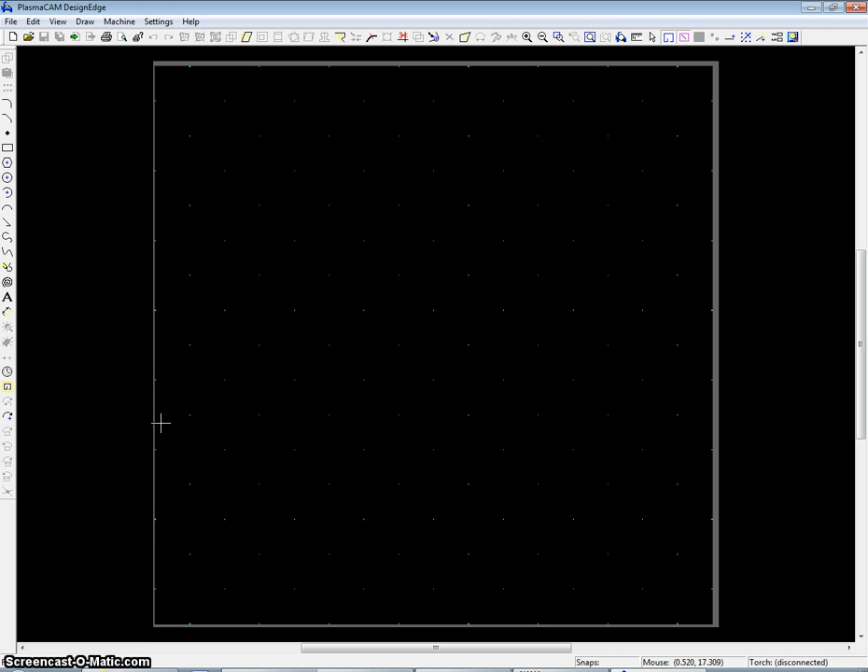It is possible to draw with this program, with some of these tools here, but it's really hard to dimension and to do complex shapes. Real quick, just do a rectangle. Where do you want to start? I'll start at 0, 0, enter. Where do you want to go to? I'll go to 20, 25. So it's basically that kind of thing where you're having to type in coordinates. And most people would find it easier to use a program like AutoCAD or SolidWorks or something else where you can quickly design and dimension parts.

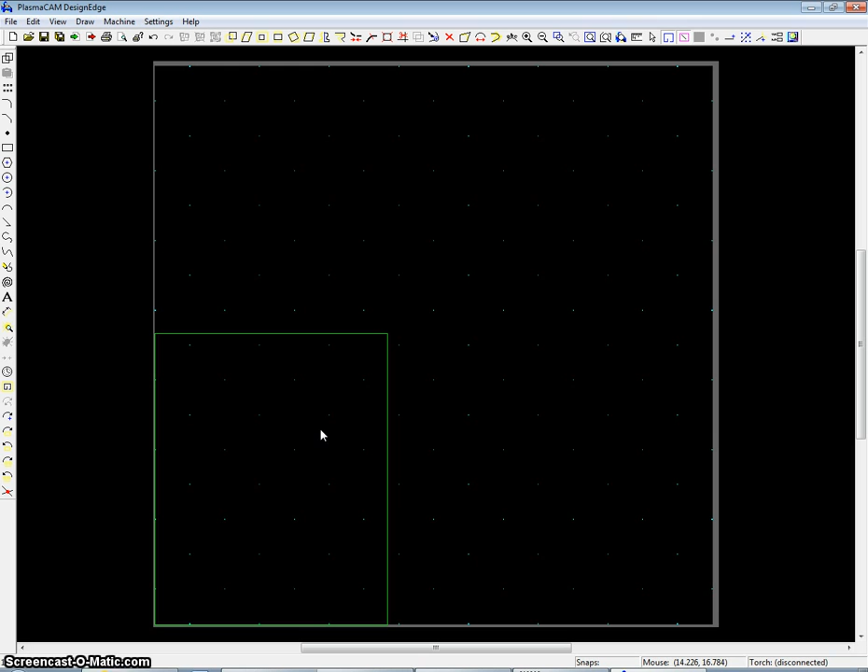From a CAD program like the two I just mentioned, what you want to do is save as a DXF file. DXF would be the best format to bring in. So that's what I'm going to do right now. I'm going to go File, Import, and I'm going to bring in a DXF file that I already have here. And it comes right in, and this has already been dimensioned and it's ready to go.

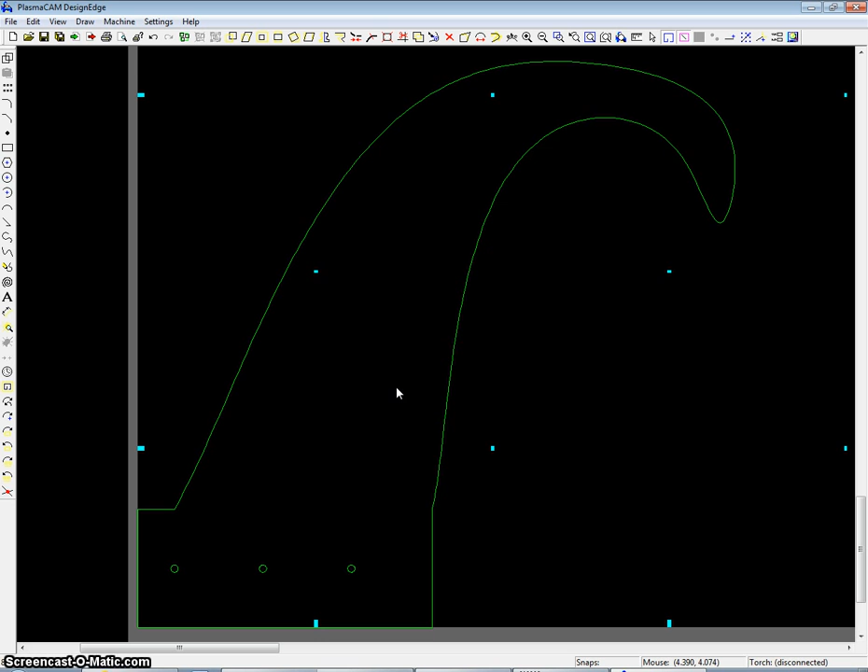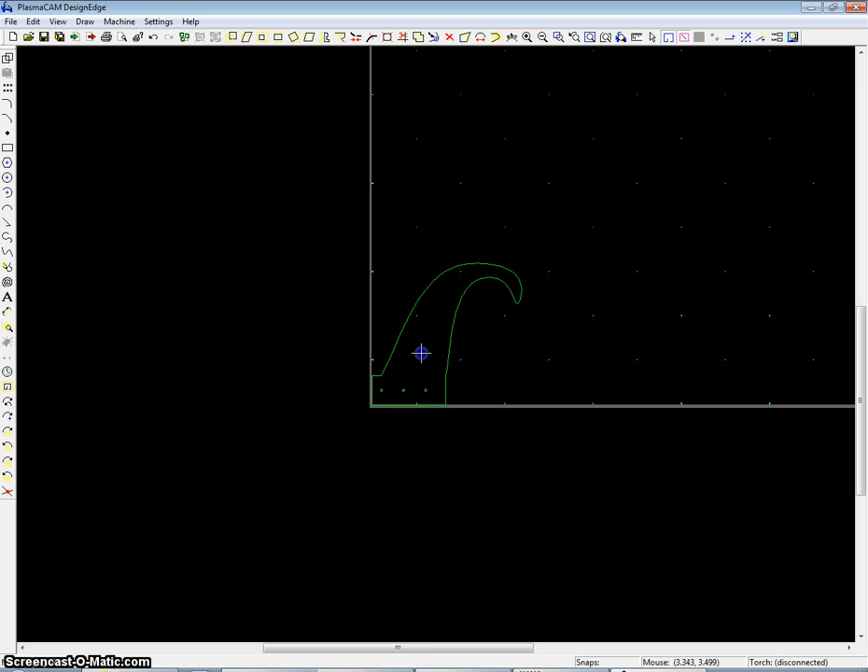A couple quick things right off the bat. The F2 key on the keyboard zooms you out, and the F1 key zooms you in. If you hold down your mouse button, you can highlight things. If I press the M button on the keyboard, then it says move from point, so I'll left click and I can move it. You can also do things like scale. You can copy and paste. You can make duplicates. So that's kind of how that works.

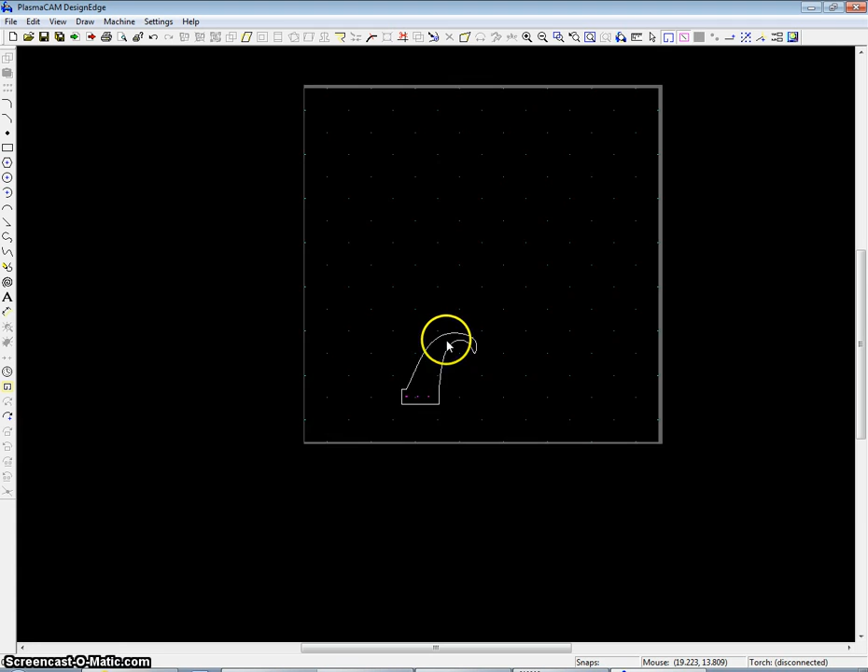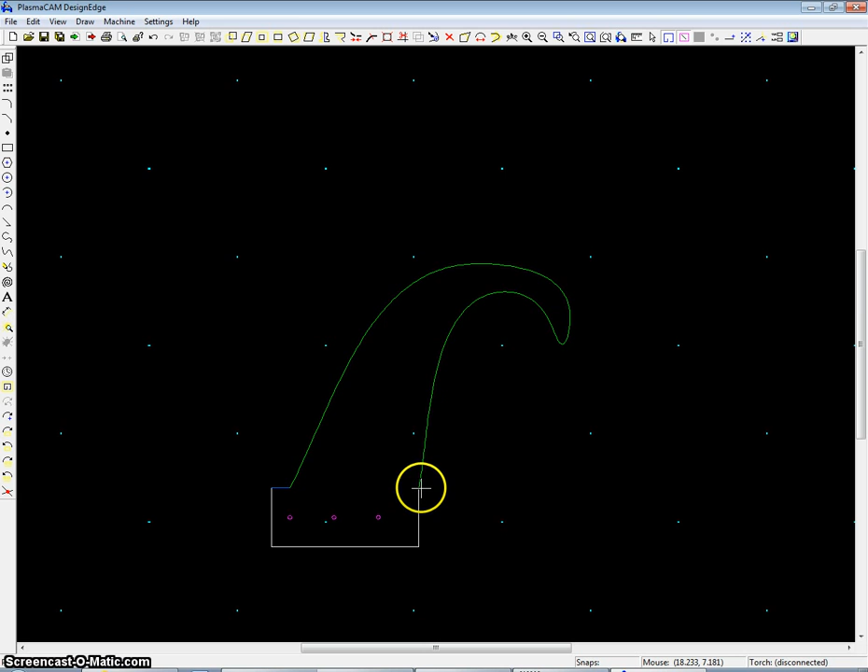So now what we have to do is make a cut path. A cut path is telling the machine where you want it to come in and fire off the torch. Do you want it to cut around the inside of the line or the outside of the line? We'll have it do these holes as well. If I go to the machine menu and I hit convert to cut path, then if I click on the outside of this white line, the machine would cut that line. If I click again, it would cut that line. And if I click on the inside of the circle, it would cut the inside of it. And so basically I made a cut path.

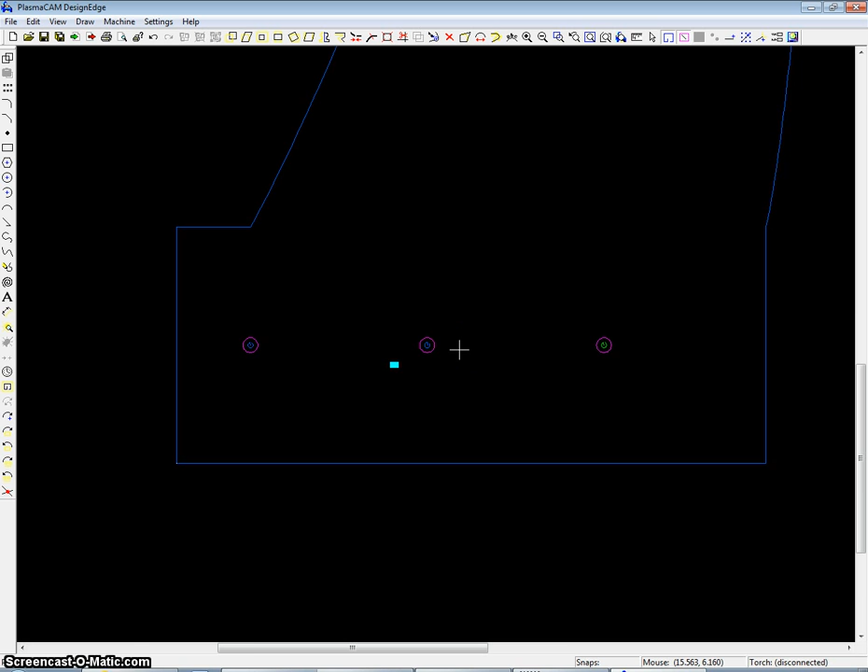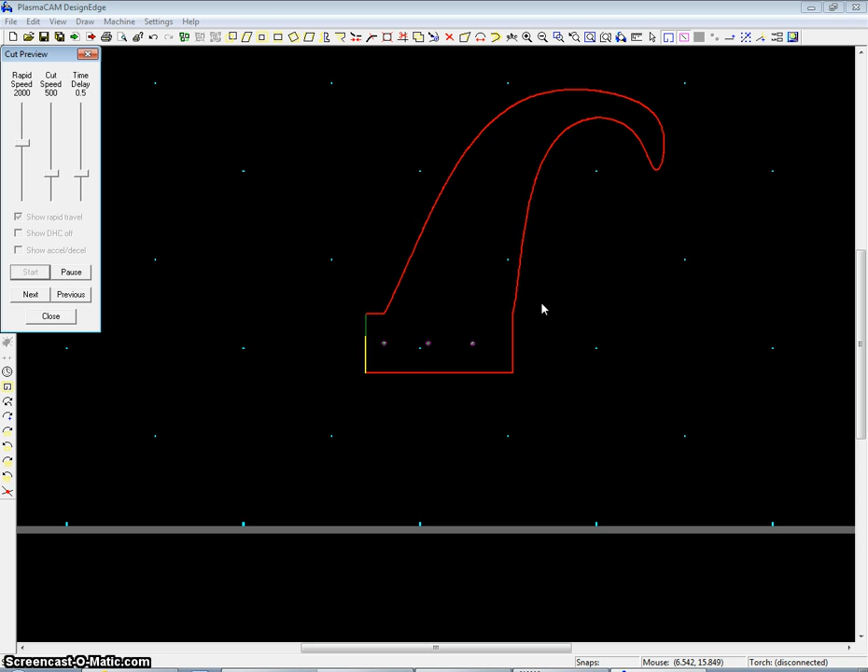But it's not really ideal right now, because, I'll hit escape, by the way, to stop that command. If I highlight this and go to cut preview and hit start, the machine's going to do this in like 5 separate cuts. So it's not ideal, and I wanted to make sure that you knew that the better way to do this perimeter would be to link this together.

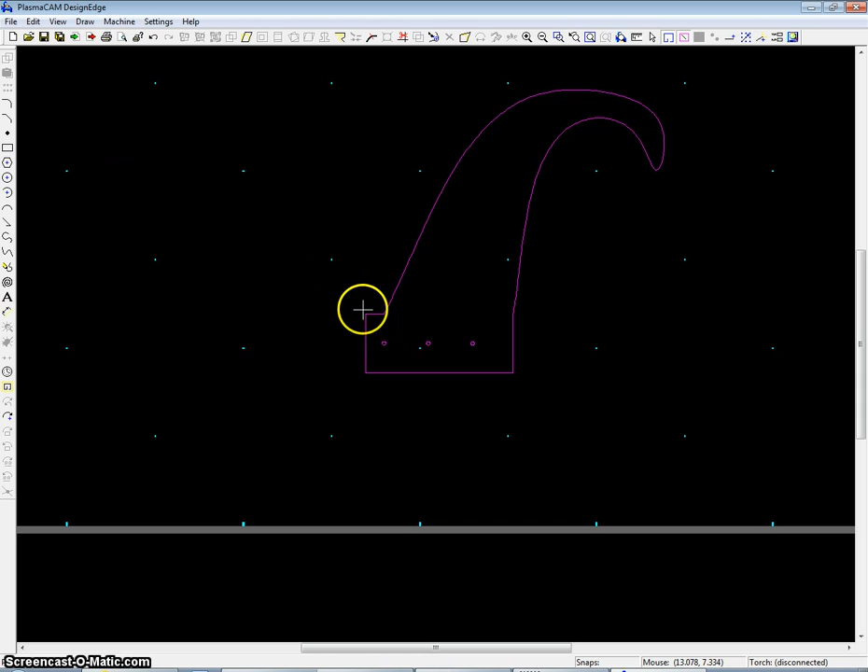So if I hold down the control key and click all this right here, I've highlighted all these lines. I can go to the edit menu and hit link. So now this perimeter is all just one thing. So it's better now for cutting. It's going to cut it all in one fell swoop. So if I go to convert to cut path, I click on this. It says, do you want to convert the holes to the inside path? Yeah, I'm done. And you can also see right here, this is showing the machine's going to fire off here. It's going to come in, go down the line to the right, and end up right there.

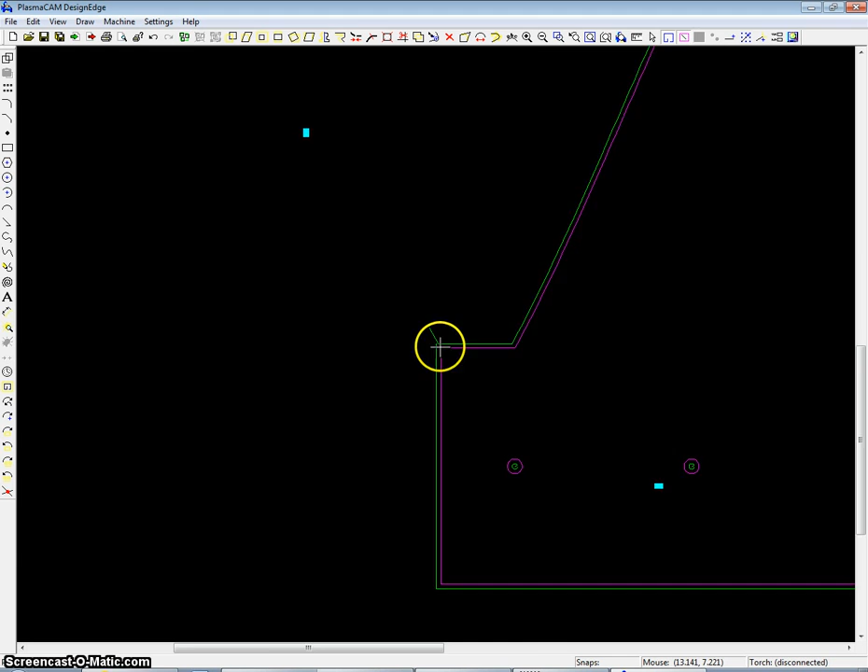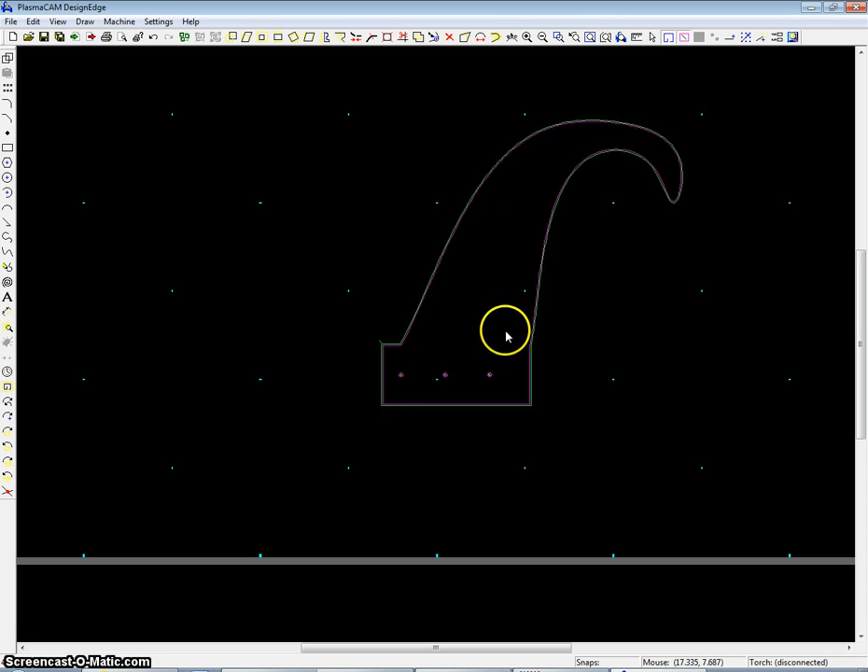All right, so now if I go to cut preview, hit start, it's doing the holes first, and then it's doing the perimeter. And that's actually what you want. Let's say it did the perimeter first, then the holes. That'd be bad, because it would cut out the perimeter, and then this piece might fall out or get tilted on the grid. When it goes through the holes, it's going to error out because the piece is not level.

So what I generally always do is I like to pick the order. If you go to Machine, Reorder Paths, Pick Order, then I can say I want to do this hole first, this hole second, this hole third, and that perimeter last. I'll hit Escape, then highlight this, cut preview, start, 1, 2, 3. It's going around. Perfect. So that's a big part right there, getting the cut path to work.

Next thing we have to do is we have to get the machine ready. So it's important to turn on the plasma cutter. And with the plasma cutter, there is a compressed air ball valve. You want to put the ball valve on first, and then you want to put the plasma cutter on second. And if all goes well, you should have a green light here. If you have an amber light here, it means you probably didn't have the compressed air on first.

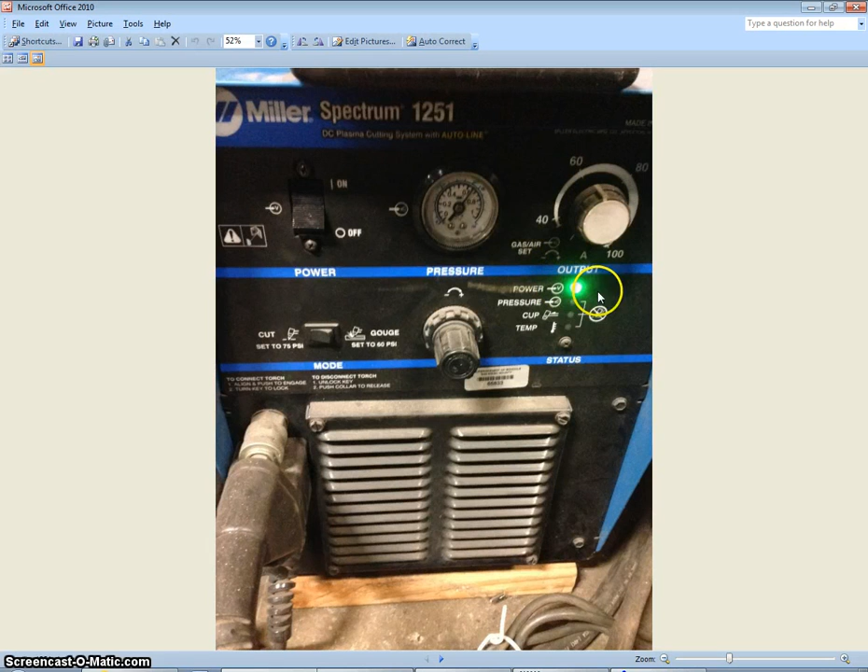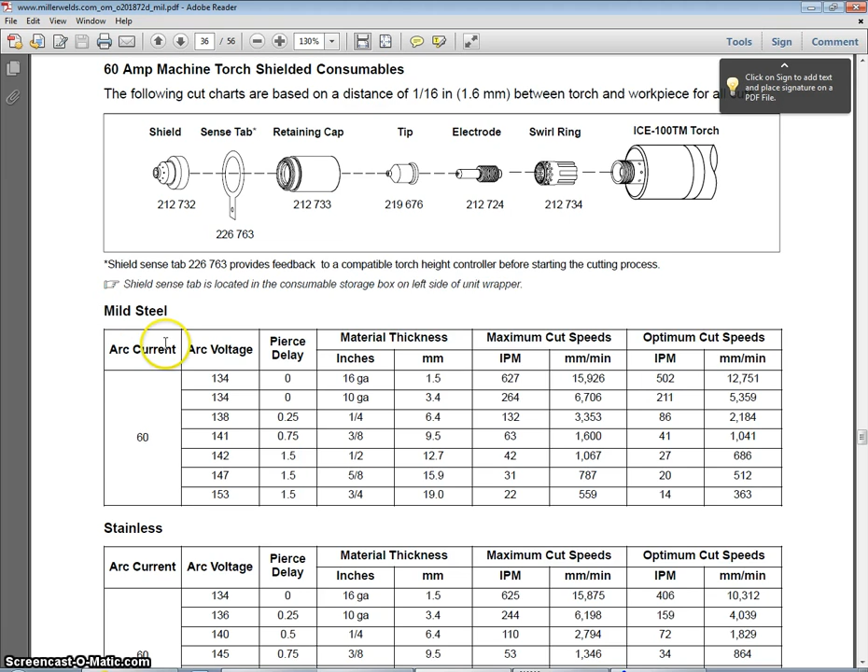So the other thing is there should be a yellow notebook right on top of the computer there, and on page 36, it's important to understand this. We have 60 amp cutting tips. So in other words, this tip and this electrode are kind of married together at 60 amps to cut. And then right here it says mild steel, stainless, and aluminum. So this is going to tell us how fast the machine is going to cut.

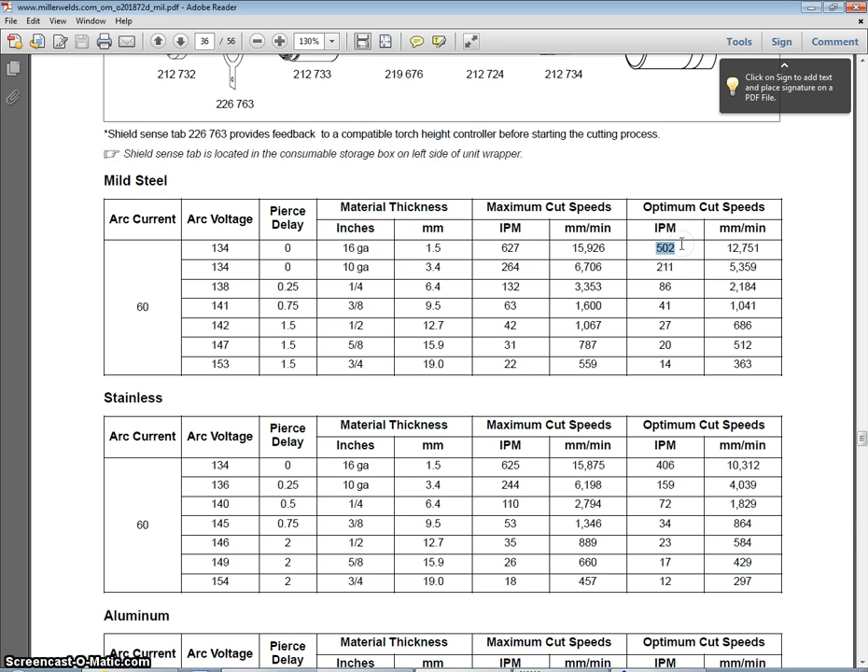And let's say, for example, if we're doing mild steel, 16 gauge material thickness, what I would look at is the optimum cutting speed. And IPM stands for inches per minute. And so 502 is the magic number. If you were cutting 3/8 steel, then I would cut it at 41 inches per minute. If you're cutting, say, 12 gauge or 14 gauge, just do some math to get the average between these numbers and figure it out. But right now, 502. I want to memorize that number.

In PlasmaCAM, where do you put that number 502? What you have to do is go to Settings, and then where it says Machine Control, you've got to get this right. This is crucial. So 502 is how fast that machine is going to move.

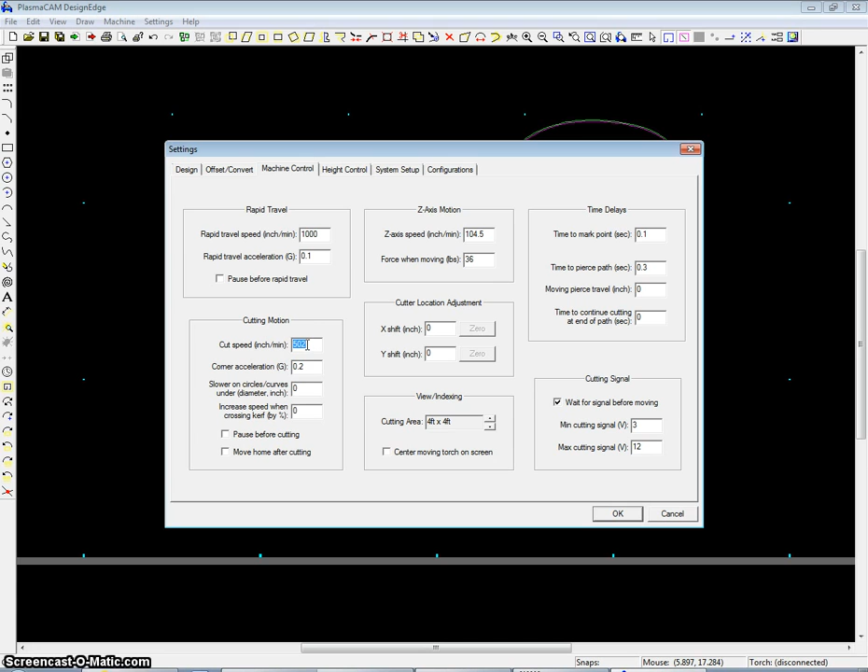Other than that, for this video, the height control can do some advanced things, but for right now, I'm going to not have this stuff checked off, which basically means I'm going to set the torch to be about a 1/16 to an 1/8 of an inch above the metal. And we'll cover more of this later on. So make sure you get the inches per minute right.

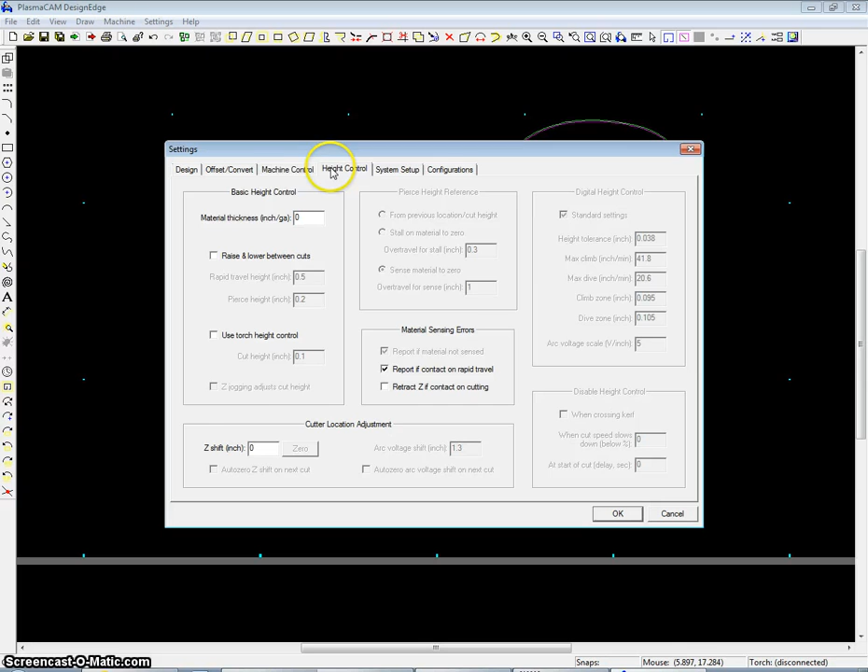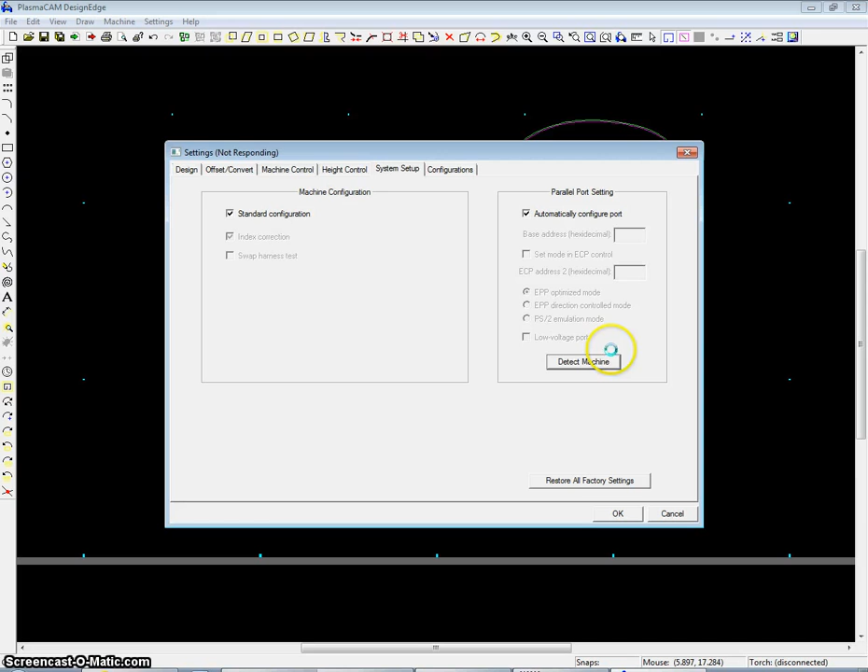Also, over here on System Setup, every time you have the machine on, you have to hit Detect Machine. It takes a few seconds. And then it should say Detect Machine Successful. Okay. Looks like it's not going to work right now. Something's going a little wrong, but it'll say Detect Machine Successfully.

And then after that, what you want to do is go down to Machine and then Initialize. And the machine will move around for a few seconds and home itself on the X, Y, and Z axis. And so once that's done, you're talking to the machine, and when you hit Cut, not Cut Preview, but Cut, it's basically going to send this to the machine and it's going to cut.

And what I recommend doing always is this button right here that says On Off. I recommend having it be off, meaning no green light here, and just do a simulate, often called a dry run. Just look at the machine, make sure it's cutting no more than an 1/8 inch off the metal and your piece of metal is not moving. If it is, it needs to be clamped down, and do one dry run, maybe even two. Make sure it's good. Then you want to click this on-off button. You have a green light.

You want to make sure everyone around you within 15 feet has glasses on. Sparks are probably going to fly. You want to have the fans on, the garage door open, wear maybe number 5 red goggles if you're going to be watching the arc. Don't watch it with a bare eye. And at that point, you have to go back to the machine and go cut again, and then it'll cut for real.

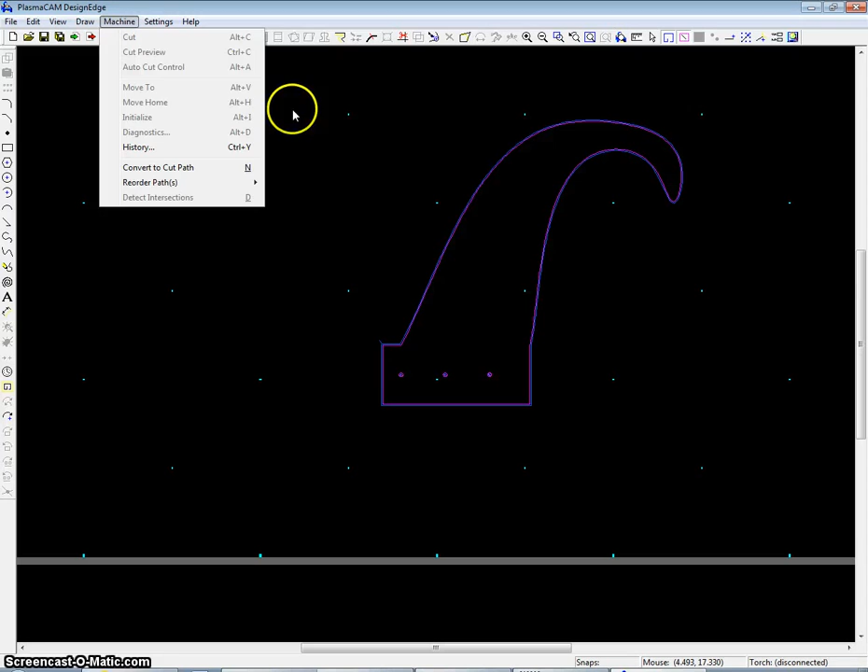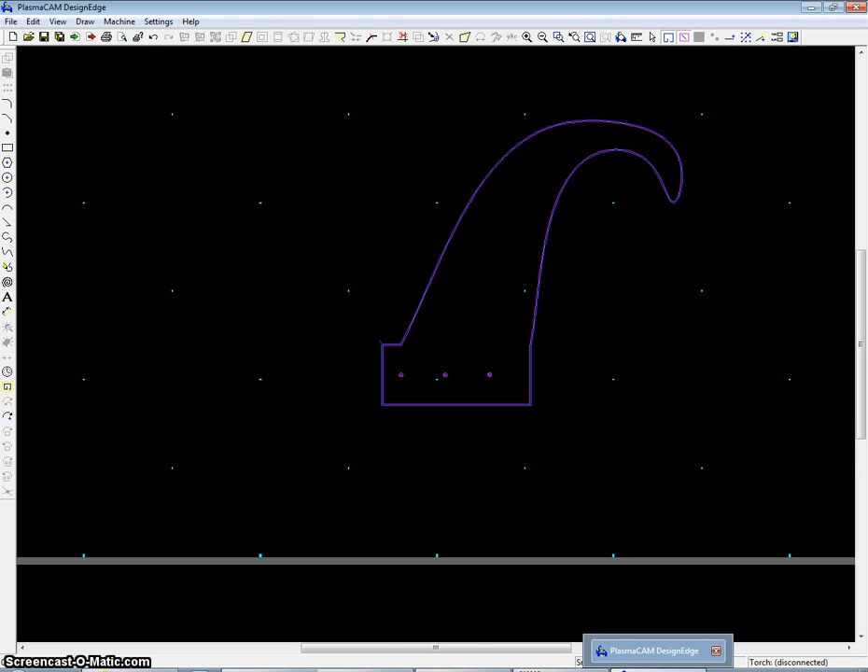So that's the end of lesson 1. And remember a couple of things: this computer gets erased on restart. There is an attached USB drive, so if you save to the USB drive, that'll remain there. The computer only gets wireless internet for a weird reason. And just like I said, if this is not flashing pause, you just want to shut off the computer, shut this off, wait 10 seconds, turn this on first, then the computer, and then you'll be able to detect the machine and cut no problem.